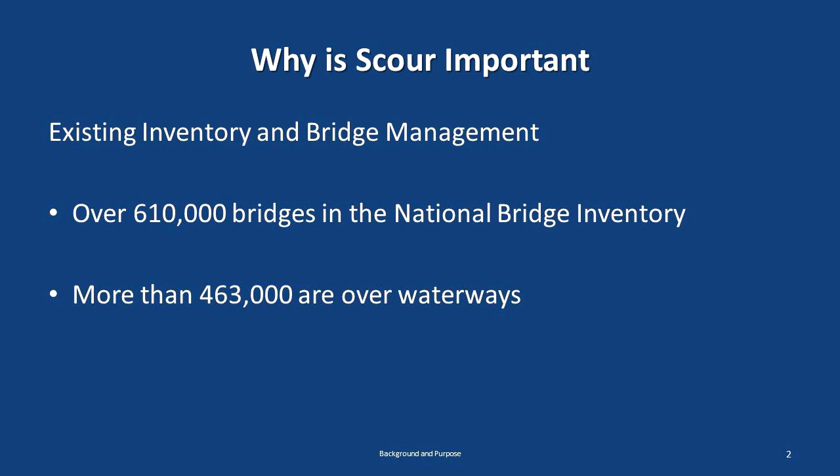The early commerce and development of our country relied on waterways for the major transportation network, and we were blessed with it. In modern day, our commerce is really dependent on our transportation highway network, and the confluence of both creates a lot of opportunities with bridges over waterways. What we're interested in here today is the Scour component of that.

Why is Scour important? Because the public and Congress expect and demand that bridges over our waterways be safe. The commerce of our country depends on it, maybe the defense of our country depends on it. Every one of us is affected daily by our loved ones and friends traveling our roadways, and when they approach a bridge, they expect to cross safely. A lot of times our family members don't even understand they're crossing a bridge - not that they're distracted drivers, they just don't realize it's a bridge.

Let's look back on history to see how we got to where we are in the Scour program today. It initiated with the Schoharie Creek failure in New York in 1987, which got Congress's attention. They said, okay, we need to start doing something about it - Federal Highways, implement a program.

Hatchie River occurs in '89, same thing - a Scour-related issue, and Congress said this is not just a wake-up call, this is something we've got to do. I-5 in California occurs in 1995, another Scour-related issue.

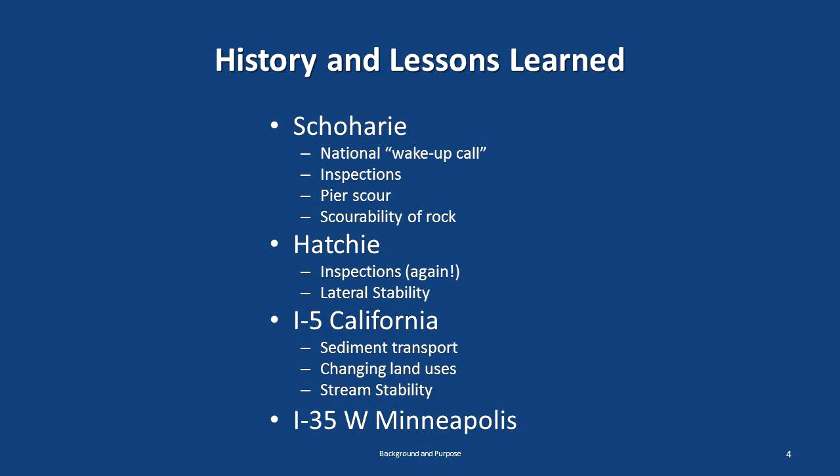I-35W in Minneapolis in recent times - although that was not a Scour-related failure - the Inspector General's report to Congress made them so cognizant of public safety and bridges that they asked Federal Highway if there were any other issues with bridges and public safety. Federal Highways went back and said, yes, Scour.

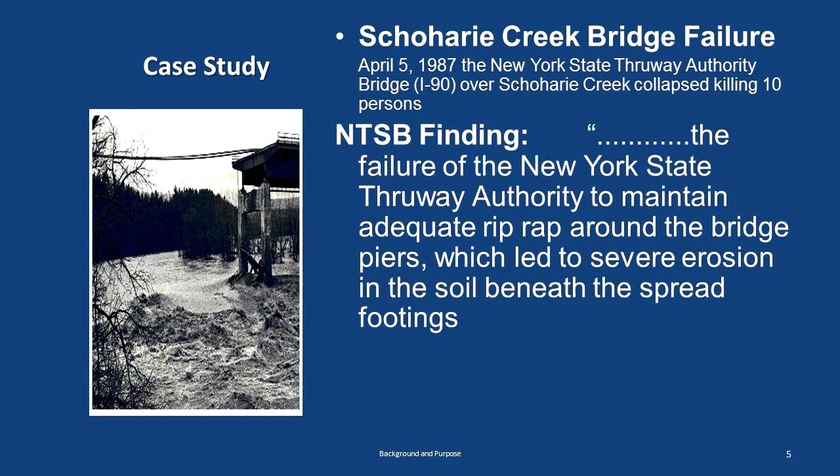Let's take a look at some case studies. At Schoharie Creek, the bridge failure was found to involve Scour issues around a foundation in the interior bent, where riprap had been applied. Whether it was sized properly was questionable, but the real finding was that the New York State Thruway Authority had failed to monitor and inspect the condition of the riprap to see if it needed adjustments.

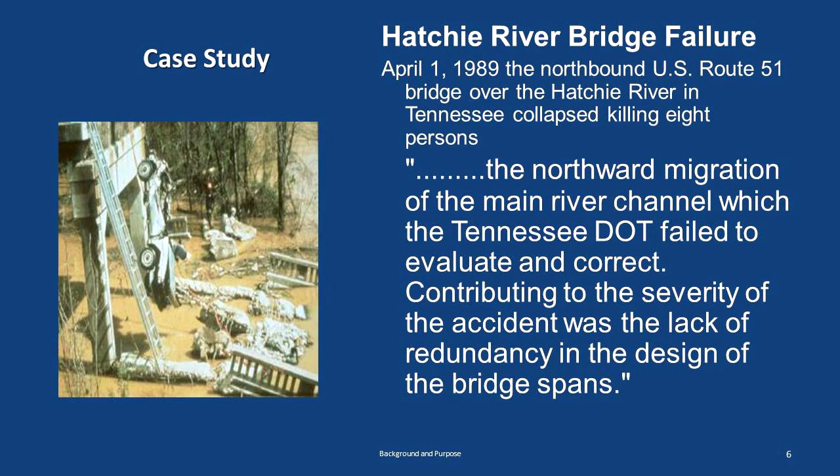The Hatchie River Bridge in Tennessee failure was a stream stability failure. It had been monitored, and inspectors had actually documented some of the stream stability issues beneath the bridge, but Tennessee DOT failed to properly recognize what was going on, or the communication through the chain of command didn't pass along the various channel configurations over time. Today we would take this as an obvious sign that action needs to be taken.

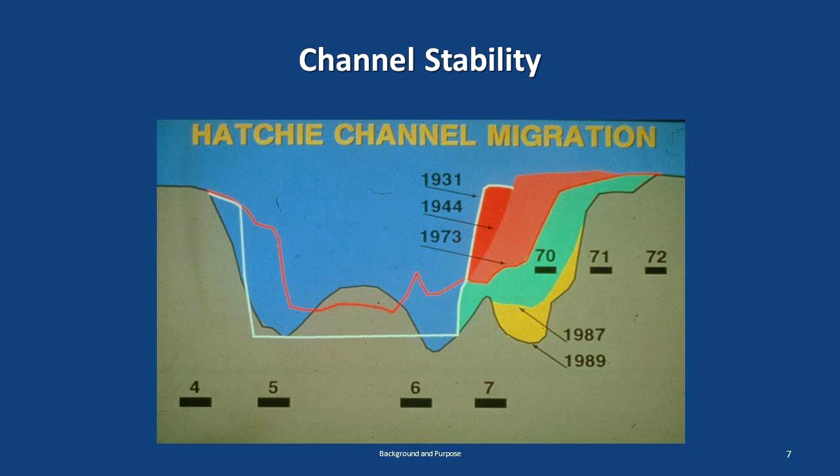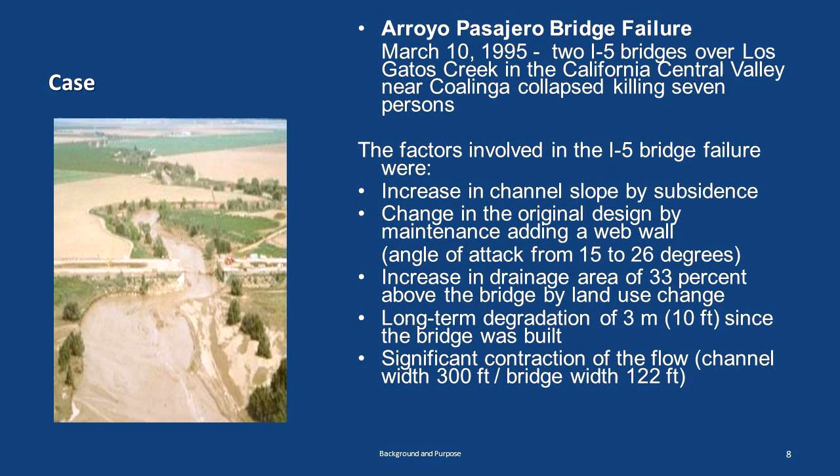The I-5 California failure involved a land subsidence issue downstream, which started a head cut moving back upstream through the bridge. That, coupled with changes in watershed use, generated about a 30% increase in discharge through the opening. On top of that, maintenance had installed a solid web between the post and beam piers, which worsened the angle of attack condition and accelerated the scour.

So, what was learned? Basically, it pointed out the fact that there was a lot of difficulty for inspection of the bridges, but primarily it indicated there was a break in the communication link between inspections, maintenance, and the design functions. The design folks say, well, we designed it right, construction built it right. Well, the inspectors need those as-built plans out there to see what changes are going on.

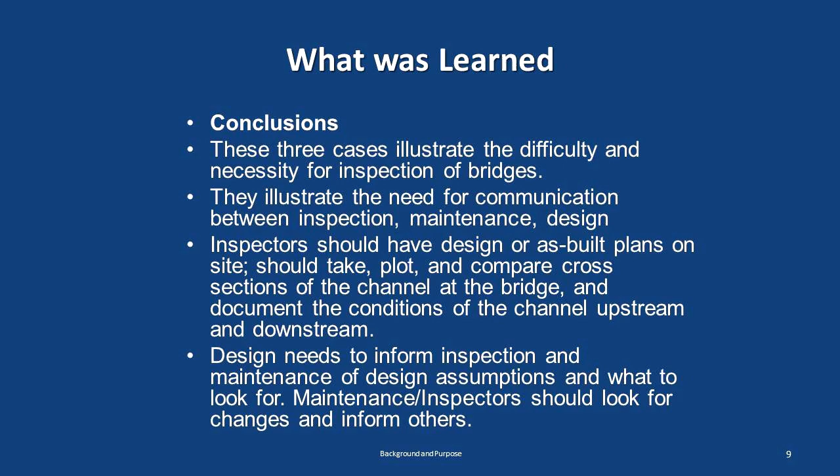They need to document what changes over time are, to get a good grasp on mitigation efforts that could be taken to prevent some catastrophe. And of course, from the inspection standpoint, design needs to be informed of what's going on out there so that they can look and see if there's something that can be done from a reasonable mitigating standpoint.

So what are the fundamental keys of a successful scour program? Well, the regulation and authority comes out of Congress. Now, I know contrary to what a lot of you may think, Federal Highway does not make the regulations and laws. Congress enacts the laws. Federal Highway Administration is basically responsible for stewardship and oversight. And the guidelines are actually developed through AASHTO in collaboration with Federal Highway Administration.

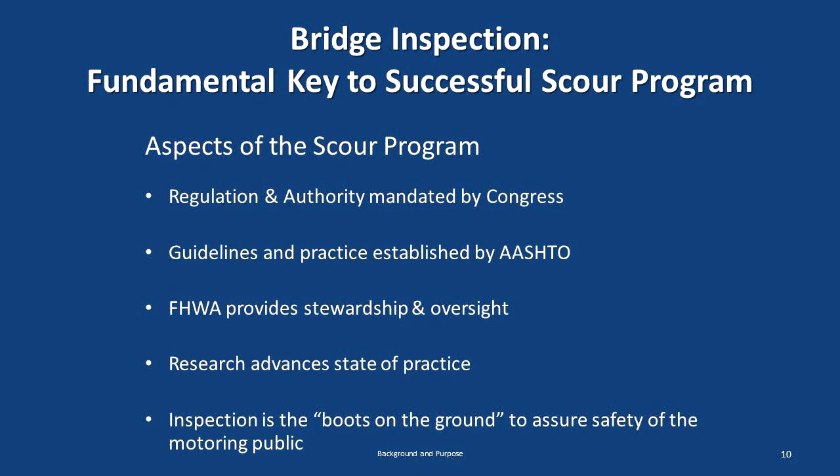But before it's vetted by AASHTO, it goes out to all the states, and the bridge owners have an opportunity to comment on that. So the main role of Federal Highway Administration is stewardship and oversight, and we help promote research out there to advance the state of practice. But the real key to the successful program is folks like you who are the boots on the ground out there every day to see what's going on. So you are the forward observer on that battlefield with scour.

Let's look at what types of scour there are. You've got general scour, and most everybody's familiar with degradation issues and head cuts, but what about aggradation? In situations like that where you have a buildup of material, and a lot of times you find it in mountainous areas where you have a tributary or a major stream coming down off a steep slope, but as it approaches the valley's edge where the roadway is, that gradient in the stream flattens out, so all that heavy material that's coming down through that steep slope is deposited right there at your bridge site.

What happens when you get aggradation like that? It builds up the bed. It denies the waterway area under the bridge. What it can do is force the conveyance of the water over the roadway approaches at the bridge, and then you've got problems that are not necessarily bridge, but it's still interfering with and disrupting the flow of traffic out there.

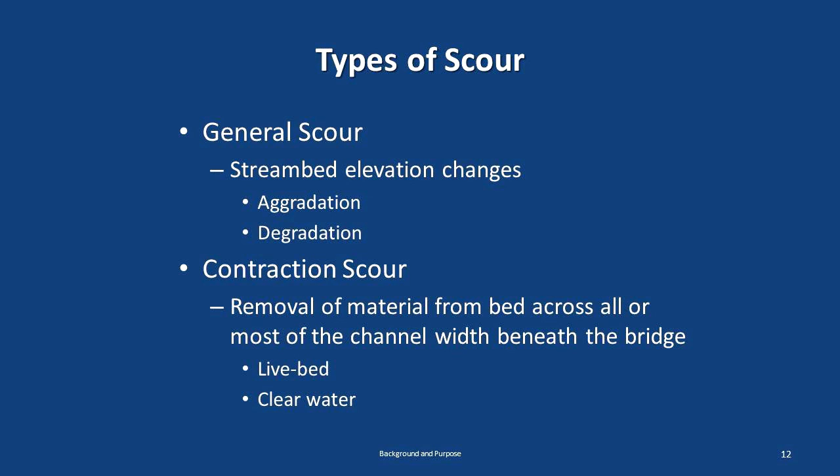Contraction scour, that's just the general movement of material out from beneath a bridge because of the restricted flow area. You've got live bed and clear water. Live bed flow is that in the channel areas where if you look down there, that little moving sand dune appearance, that's live bed. The clear water scour is usually what happens in your overbank areas underneath the bridge where you get that contracted scour or contracted flow from upstream going through the bridge in the floodplain area beneath the bridge, on the larger bridges.

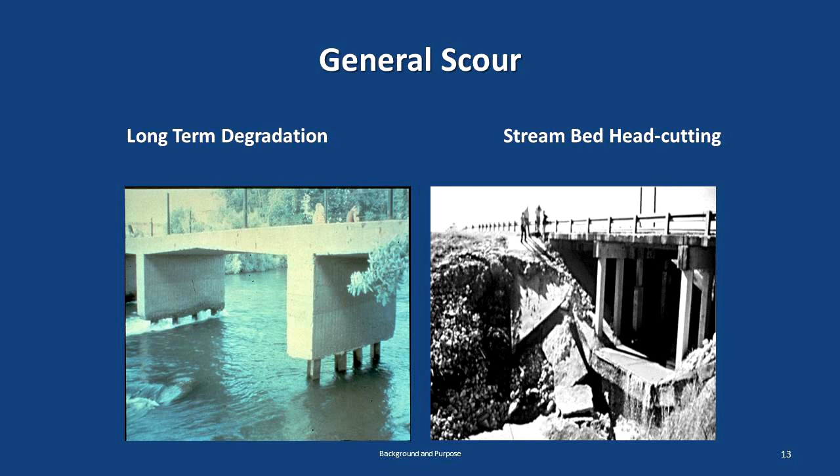So here's a couple examples of the general scour. As you can see on the left, you have the general degradation in long-term scour. The one on the right is a head cut, and you can see there's actually been some mitigation effort attempted in there to save the bridge, but even that has been jeopardized. Contraction scour, as we were talking about a while ago, you get that flow coming in from the wide floodplain.

Basic simple hydraulics is discharge is equal to velocity times area. If you take that floodplain area and you restrict it to the area beneath the bridge, you're reducing that area, so velocity has to go up. So that's what creates your scour beneath the bridge.

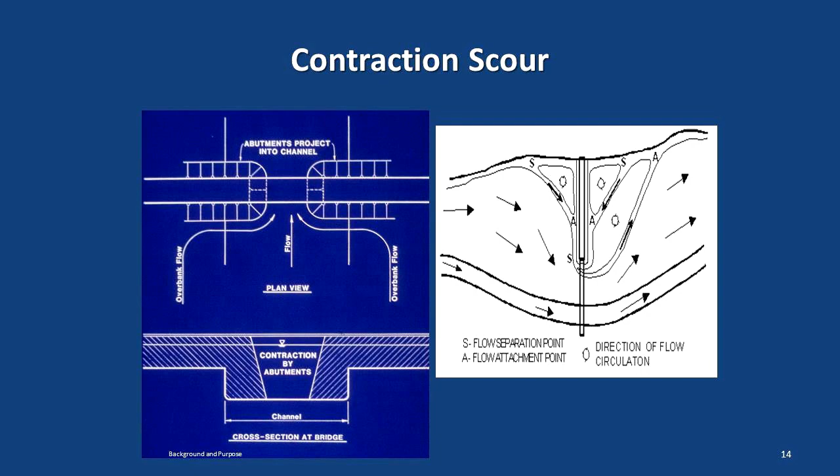Local scour. You've got abutment scour, pier scour, and some of you may have had the opportunity to deal with spur dike or embankment scour. And the purpose of a spur dike is basically to help make the bridge opening more efficient by actually funneling water upstream into the bridge opening and then out of the opening in a uniform manner to prevent that formation of those eddies or vortexes that create the scour.

And what can be done is you're actually not eliminating the scour totally. What you're doing is moving that scour out from beyond the bridge to where it's not going to be noticed at the bridge immediately and cause a problem at the bridge. Scour that occurs several feet or 100 feet upstream or downstream gives you time to monitor that scour at the spur dike and do remedial action if it's needed.

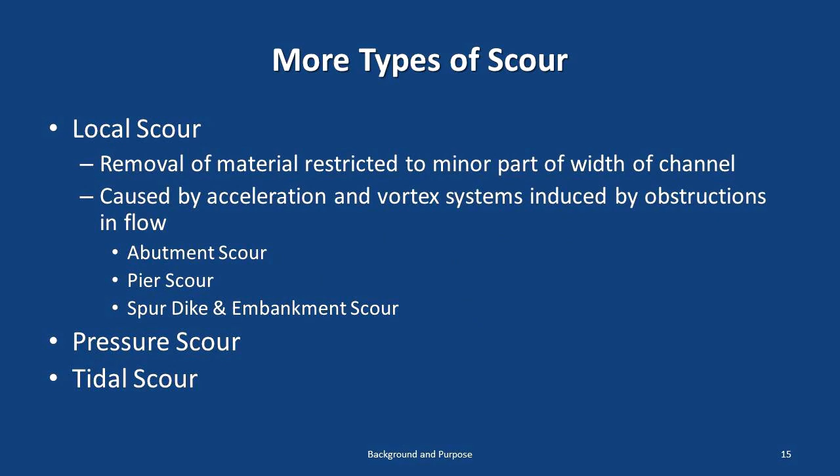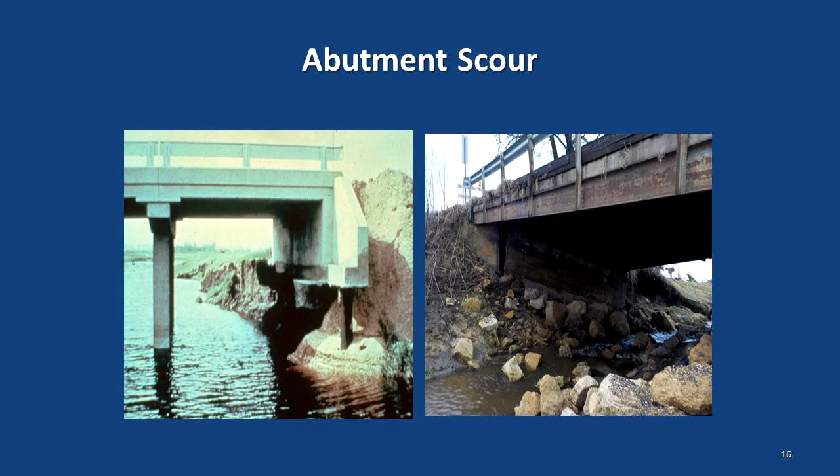The one on the right is one that occurred about 6 weeks ago in Wisconsin. Actually, there was an abutment scour problem on the end just off to the right of the picture about 2 years ago. Maintenance went in and put a POR there, a pile of rock, and it protected that particular abutment, but it forced the flow back over to the other abutment, which caused the failure.

I'm not picking on maintenance, because having worked with our maintenance folks in North Carolina for decades, they do a great job with the limited resources and time they have. A lot of times the only thing they can do is put a Band-Aid on it, but that's what they have available, and they try to do the best they can. So I'm not knocking the maintenance efforts.

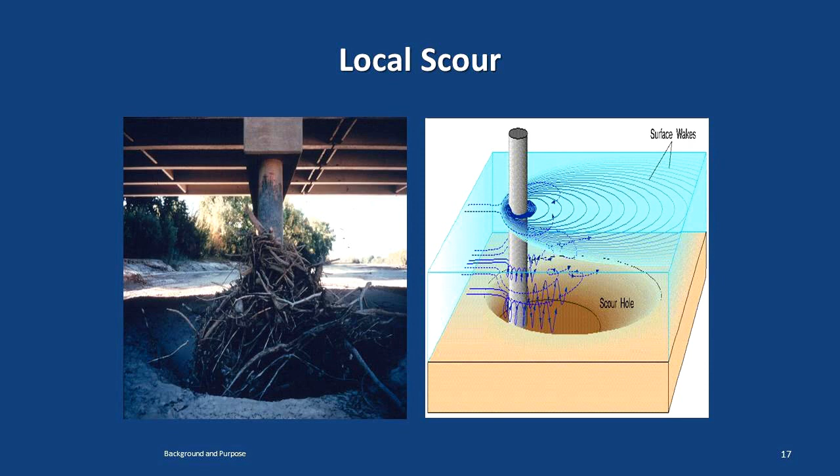Local scour is another example of discharge equals velocity times area. Even though that pier in the middle of the stream represents a small cross-sectional area in the flow path, it still creates the same situation where water speeds up to get around it, because you've got the same amount of water coming in as going out. So water has to speed up to get around that pier.

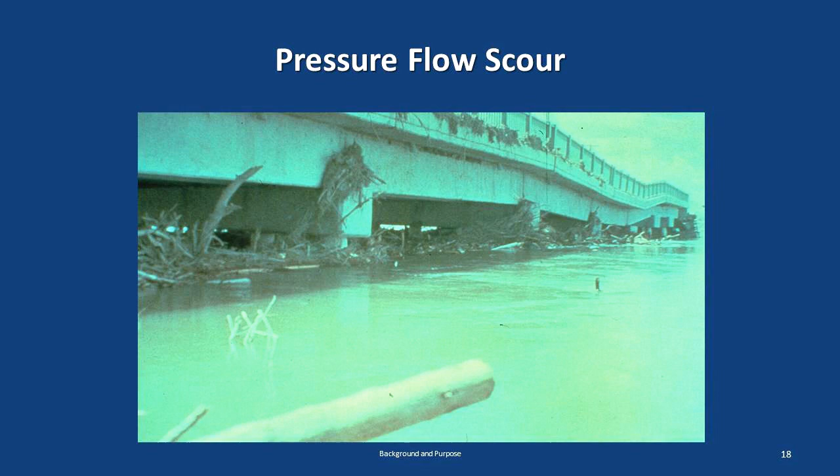Pressure flow is basically when water gets up on the superstructure. You're looking at a situation just like horizontal contraction scour, except this is a contraction scour in the vertical direction.

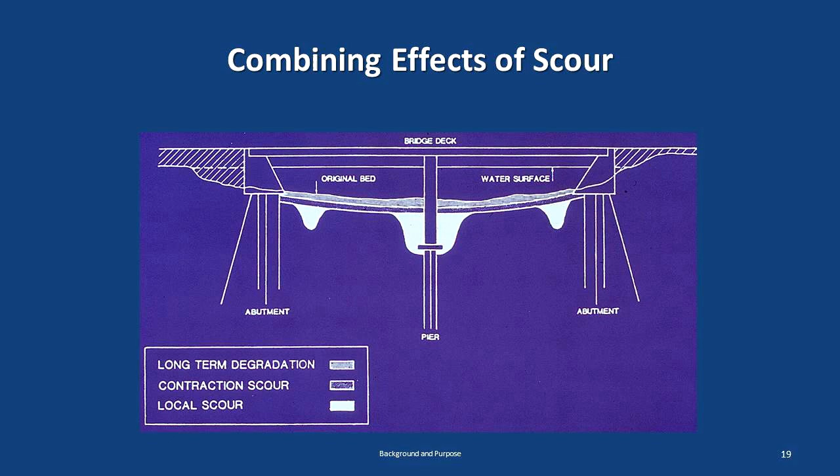Combining the effects of scour: you have the original bed profile up at the top, and then long-term degradation, which takes it down to this darker strip. That darker strip represents the contraction scour factor. Then on top of that, you add in your local scour, which is your scour at the bridge pier. Also, there's the potential for that same type of scour at each of the abutments. So yes, you do combine all the effects we've been talking about.

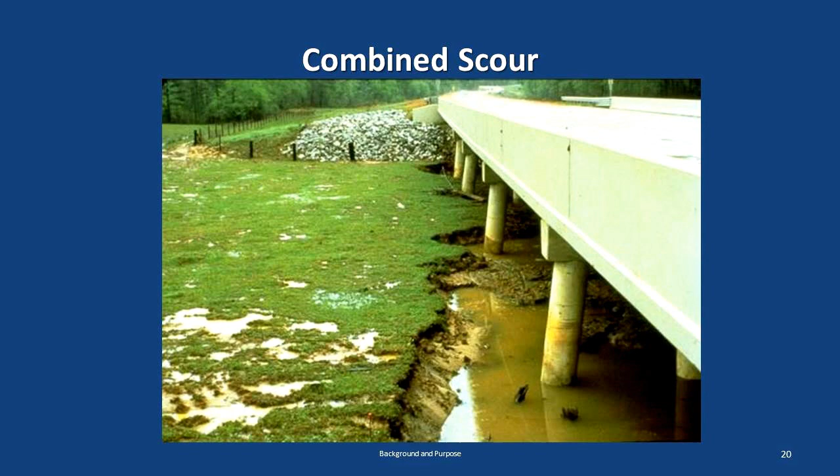I'll guarantee you this pier up here in the very front, where the pressure flow is dominant, if you really took soundings out there, you'd probably find it is deeper than the local scour back in the background, because it's been added to the pressure flow scour.

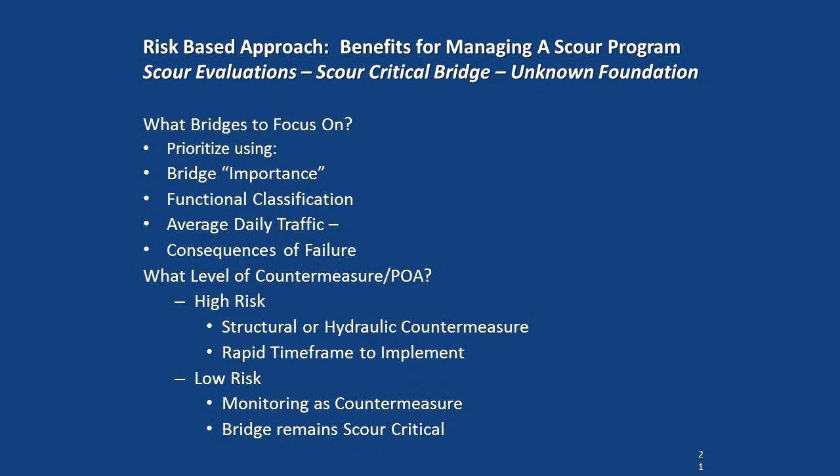Congress asked Federal Highway to implement a risk-based and data-driven bridge program, and in 2011, Federal Highway applied that to the Scour program as well. What the risk-based, data-driven approach does is allow bridge owners to focus their level of effort and limited resources on those bridges that have the greatest importance. To do that, you must establish the criteria for high risk and low risk. So let's take a look at it.

What is the risk based on, and what is the data-driven part based on? The risk-based part is basically the importance of the highway—significant interstate and major traffic conveyance arteries. Some may be important for connectivity of the community, some for local commerce. Those might be your high-risk bridges. Your medium-risk bridges may be state-owned bridges on the state system with long detour routes that have to be accommodated. Then there's another category, low-risk bridges, out in rural areas on county road systems with very low ADT.

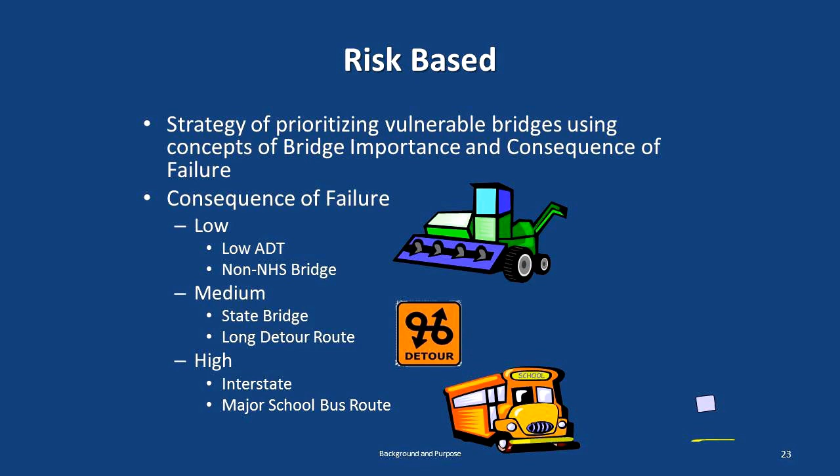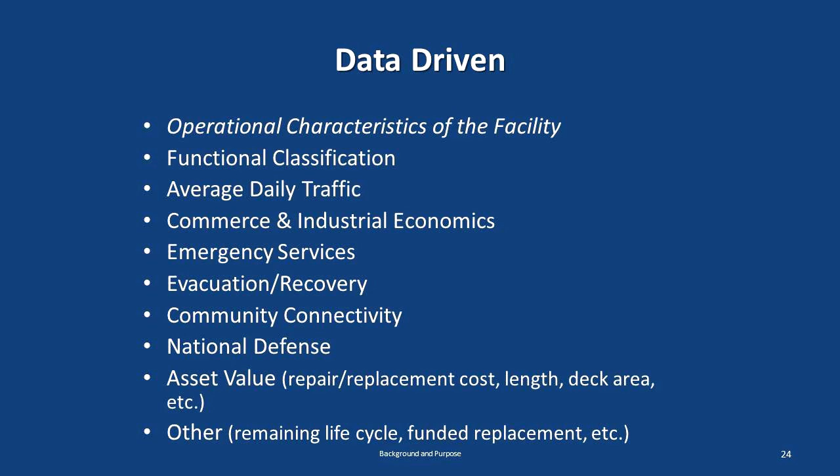Another one is the remaining life cycle—how much remaining life does that bridge have? That might help you decide whether you need a structural or hydraulic countermeasure, or maybe long-term monitoring for the remaining life of the bridge. One thing you want to look at in that life cycle analysis is whether there's a funded replacement for that bridge.

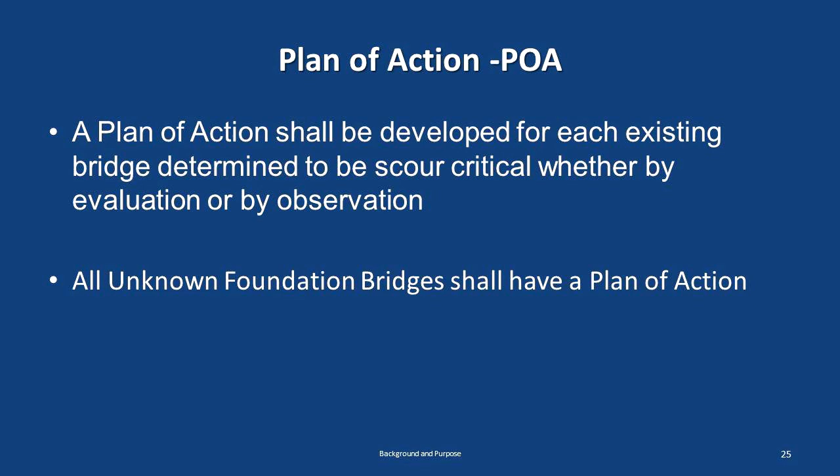If the life cycle is another 10 or 15 years, that's one thing, because as we all know, as we manage our programs, those replacement dates are not cast in stone—they're prioritized based on need within the system. So particularly for bridges that have funded replacements, long-term monitoring might be the appropriate countermeasure. But they all need a plan of action, because it's mandated that all scour-critical and unknown foundation bridges have an active plan of action.

But then again, if you have a high risk and a high consequence of failure bridge, those need a very detailed plan of action.

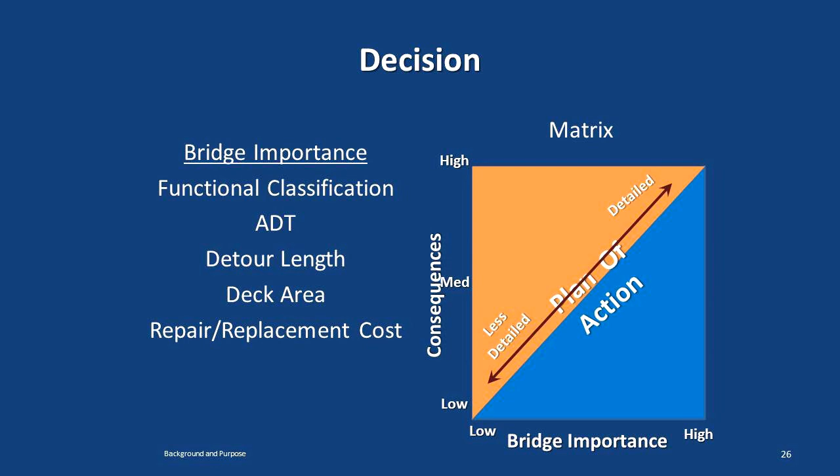The reason we say this risk-based and data-driven portion in the plan of action category is important: why should bridge owners and program managers spend all their time developing a 16 or 18-page document for a rural road that carries 100 vehicles a day, with an accessible detour around it? Why waste time developing a detailed plan of action for that when you need to be focusing on the more important highways?

Where you're going to need to communicate information about who's going to close it, who's authorized to close it, how the communication is going to get out to the community, what the detour routes are, how those detour routes are going to be marked, and so on.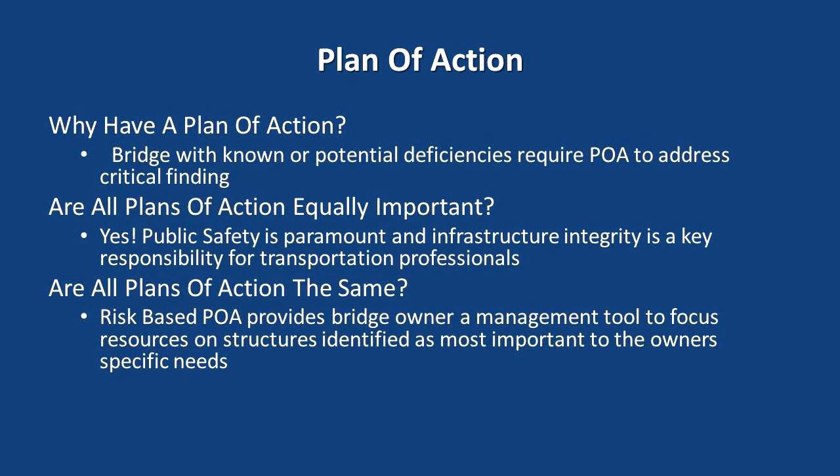So the plan of action, as we discussed a while ago, should include the type and frequency of inspection, detour routes if appropriate for the high risk, and what would be looked at if it's in a monitoring mode.

The high-risk ones are the plans of action that would be looking at a replacement or a countermeasure installation, and the countermeasure installation needs to be done in a timely manner. This plan of action stays enacted until such time as it is either replaced or that countermeasure goes into place, and at that point the plan of action can be removed from that bridge.

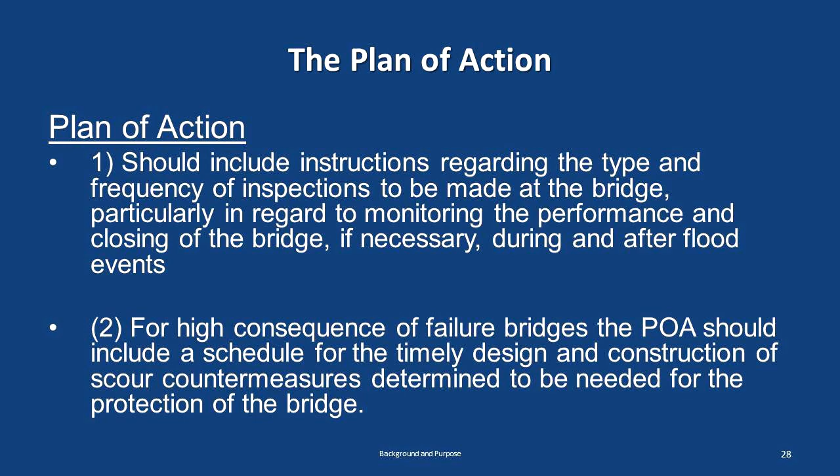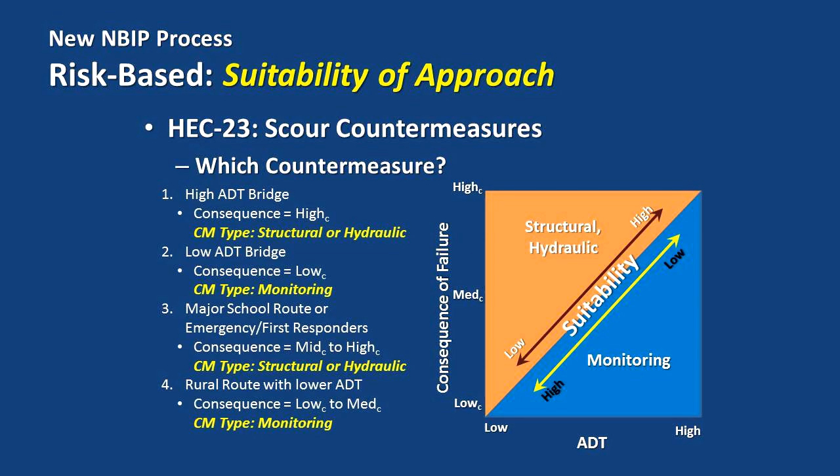So what types of countermeasures are we talking about? Structural and hydraulic versus monitoring—here again, the same decision-making process. This isn't anything new to the engineer, particularly in the maintenance arena. We deal with it every day, but a lot of times people take it for granted and don't apply it consistently across the entire system. And that's what Federal Highways is really interested in—that this risk-based approach can be applied consistently and uniformly across the entire system.

Now, one thing about it—meanders always move downstream. So if you have a meander at the bridge or just below it, that's eventually going to move on out. But if you've got a meander just upstream of a bridge, that needs to be monitored and documented, because over time that meander upstream of the bridge is going to work its way beneath the bridge.

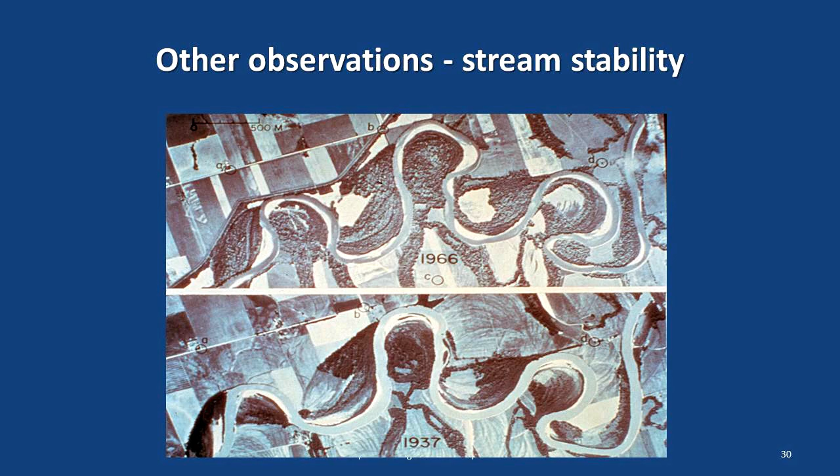A stream, a natural waterway, has an equilibrium system, and it tries to stay in equilibrium, and anything that alters it ends up exacerbating changes in the stream. If you notice in the bottom picture, there aren't many sandbars in the bend, but in the top picture you see sandbars on the inside of the bends. Those sandbars are trying to balance that equilibrium, but they're pushing the stream to the outside and downstream direction. That's a prime example of a bank instability issue.

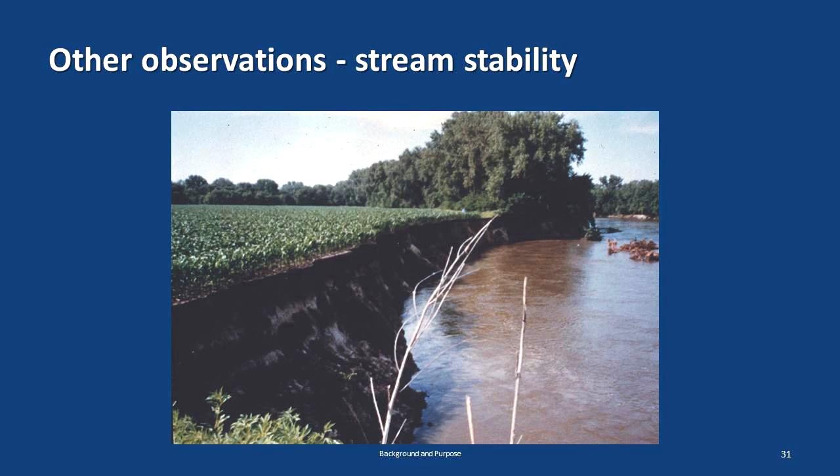So, waterway adequacy - a lot of people wonder what that is. Well, when you go out there and notice that a bridge is uniform width upstream, the channel itself is uniform width through the bridge, and uniform width downstream, that's a pretty stable stream, particularly if you don't see any sloughing or vegetation change along the banks.

But if you see a channel that bulges out as it approaches the upstream part of the bridge, is wide beneath the bridge and just below it, then goes back down to the same type of channel geometry as upstream, that's an indicator of high velocities through that bridge opening - there's a waterway adequacy issue at play.

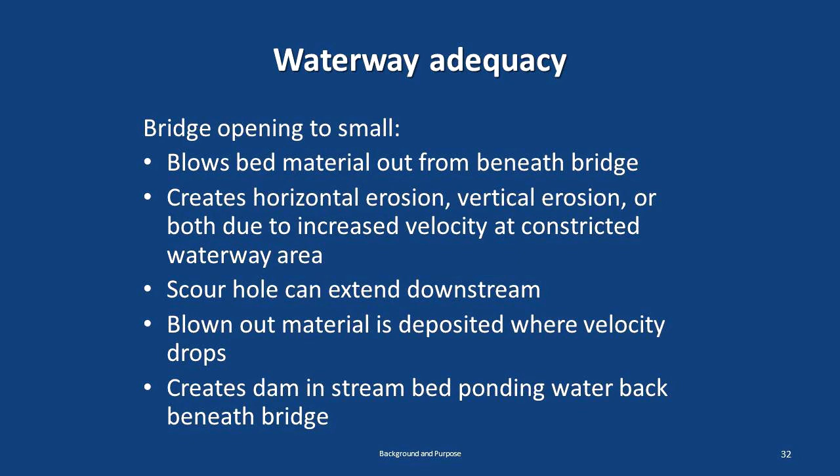What tends to happen is those velocities pick up, as we mentioned, and it creates what we call a blowhole, which is that ponded area beneath the bridge itself. Oftentimes they appear as a teardrop leading off downstream, because as the velocities slow down on the downstream side, it starts depositing the material blown out from beneath the bridge and creates a small dam. So you might have a couple feet of flow depth in the upstream channel and a couple feet downstream, but beneath the bridge you might have 10 feet of water. That is a blowhole, and it's an indicator that the waterway adequacy is marginal.

So, the role of the bridge inspector: the inspector should adequately record the present conditions at the bridge and the stream. Because if you don't record what's at the site today, how will you know how that compares on the next cycle, or five cycles down the road, like that Hatchie River Bridge we saw? They documented it, but nobody did anything about it - and there's an awful lot that's never documented too. So take soundings, document channel cross sections, identify critical scour and stream stability conditions like we just talked about. Promptly communicate findings up to other disciplines through maintenance or asset management, get the design group involved, consider monitoring the site more frequently, and if it's bad enough, as Tom and Shay mentioned earlier, close the bridge.

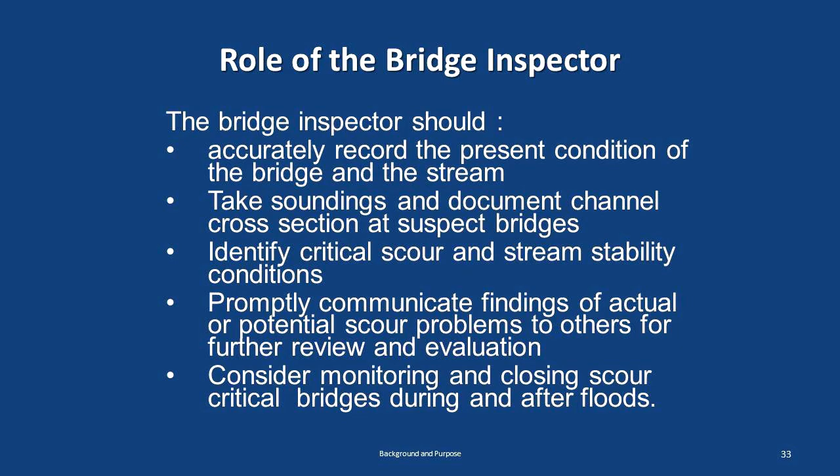So, how many folks in here have prior military service? Raise your hand. All right, first, thank you for your service. Secondly, I'm sure you're familiar with the role of the forward observer.

Forward observers in the military are the folks out on point, looking at what's going on, calling in support from artillery, air, sometimes even naval forces, to bring to bear something that provides relief at the site they're at. Basically, they have all this massive firepower at their command, but in the Forward Observer's creed, there's this line: 'My greatest tool, however, is my radio.' What that means is, without communication, what he sees and what he's doing is worthless. So communication is key to success in the continued engagement with scour at bridges. Every one of you out there plays a role in that - you are the forward observer against scour. So I appreciate it here today.